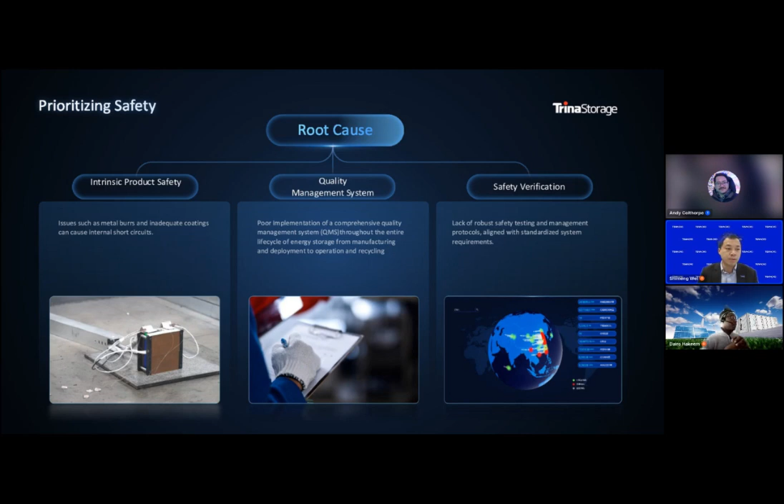We start with identification of the hazards. The hazard is the damage that could be done to the people and to the environment, causing a loss in money or in health. That's why for the battery storage system, we start with identifying what could do damage to people and the environment. The risk is actually a combination of the possibility that a hazard could happen and the severity of the hazard.

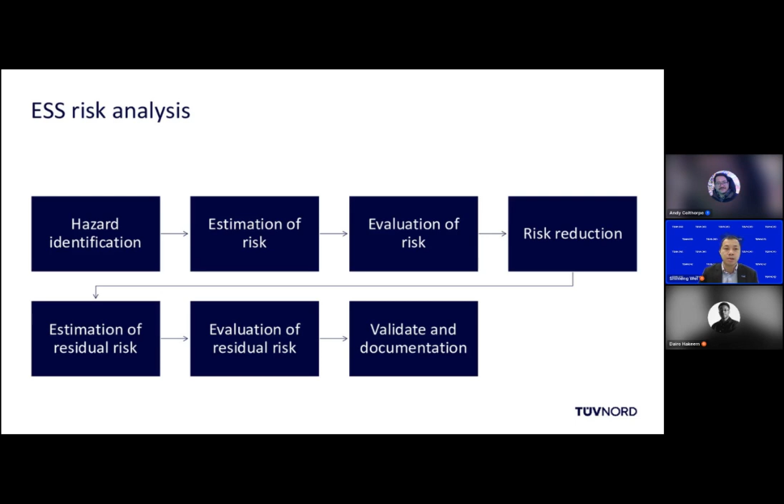For the battery storage system, which is a combination of high voltage, heavy machinery, and the possibility of overheating, here are some examples or aspects to consider when identifying hazards. Such as electrical hazard, which most of the time could cause electrical shock to people, and also arc flash, which can lead to other potential hazards like fire.

From the mechanical side, we should consider that now the energy storage system is bigger and bigger, and each battery pack is also getting heavier and heavier. So the risk of the battery pack dropping could also cause damage to maintenance people, and furthermore could also cause explosion of the system.

And we have the fire hazard as well, which is clearly on the way. And we have the temperature hazard, either too high, which causes damage when people touch the battery pack, or too cold, which could also cause problems with the system itself.

When explosion or fire happens, the chemical hazard comes out, where we can see gases leak into the environment and cause severe damage to people around. We also have something not visible but always there: magnetic and electromagnetic hazard, and for maintenance people, unsuitable working conditions could also cause problems.

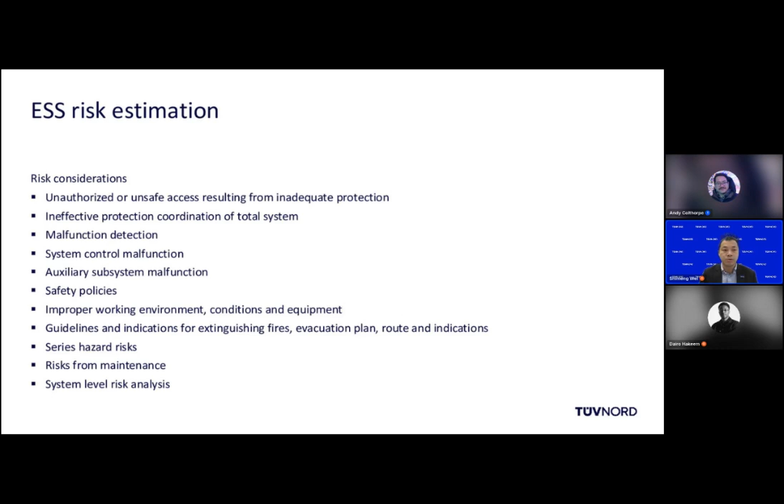The next step, as we just talked about, is the risk estimation, where we need to consider the risks that could happen. Something I want to emphasize is that the battery energy storage system is quite new in the market. Therefore, something still not so perfect in the real world, such as safety policies, guidance and indications for extinguishing fires, evacuation plans, routes, and indications. These are things that will have to be perfected over time and have to be borne in mind alongside all the other considerations.

With regard to the evaluation method, there are some systematic methods that could be applied. Nothing is good or bad, it just depends on the hazard or the risk we want to analyze—different methods could be used. When we categorize these, we can use the bottom-up first principle risk analysis, such as FMEA, and also other ways like Fault Tree Analysis (FTA), which is a top-down analysis, and also some combined or integrated analyses, such as HAZOP methods.

In the end, we need to take some measures to reduce the risk. There are generally two categories: preventive measures and protective measures. Preventive is when you do the design to make sure the risk is prevented from the start. Protective is like a safeguard when the preventive measures aren't working or have problems, so you still have a second layer that can protect and reduce the risks.

There's one particular thing I also want to mention: operation and maintenance. In the market, since battery energy storage systems are still new, the experience for operation and maintenance work still needs to be perfected over time.

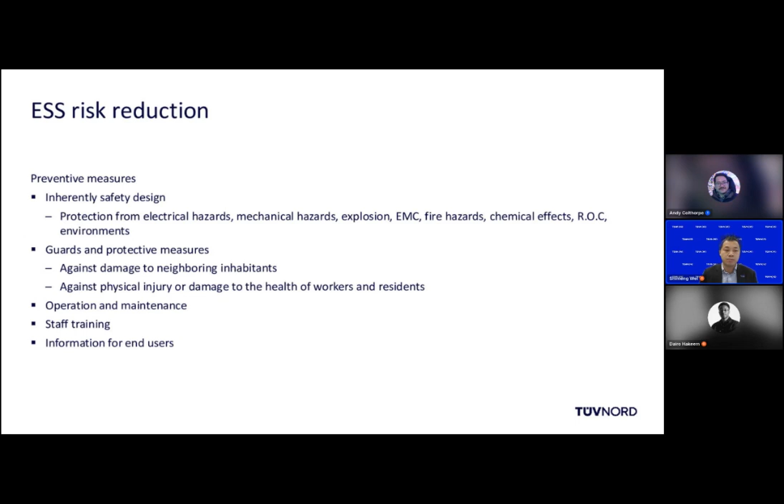Thank you, Shimeng. So we've talked about the general challenges we face, safety, and the risk assessment. I think what we're trying to highlight is how much work needs to be done to achieve the safety goals set, either at the start of product development or project development. With batteries, yes there's product safety, but there's a huge chunk of the overall safety plan attributed to the project or the site. That's just one aspect that's really important to consider aside from the product.

So I'll jump straight into talking about our product, what we offer the market to try and alleviate some of these pains, and how that could work in your project or on site, based on what we've designed.

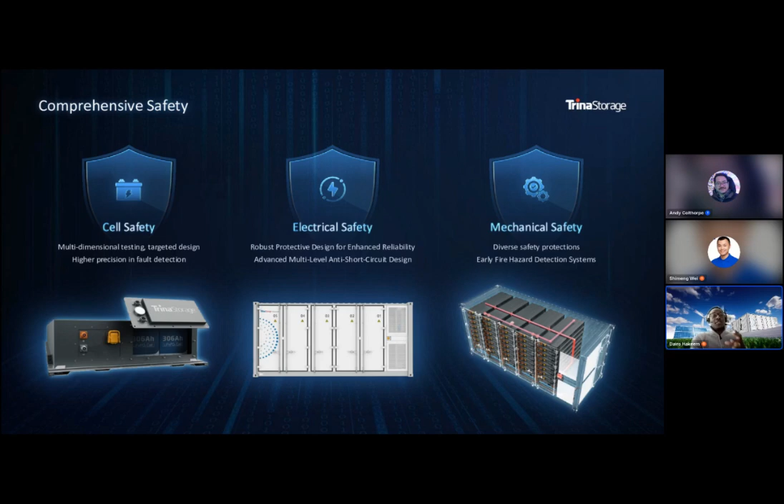Looking into that, I'd like to introduce our Elementa platform. This is Elementa 2. There might be some on the call who already have an Elementa, who have evaluated or looked to have one. I want to talk through some of the key features we have that help promote its safety.

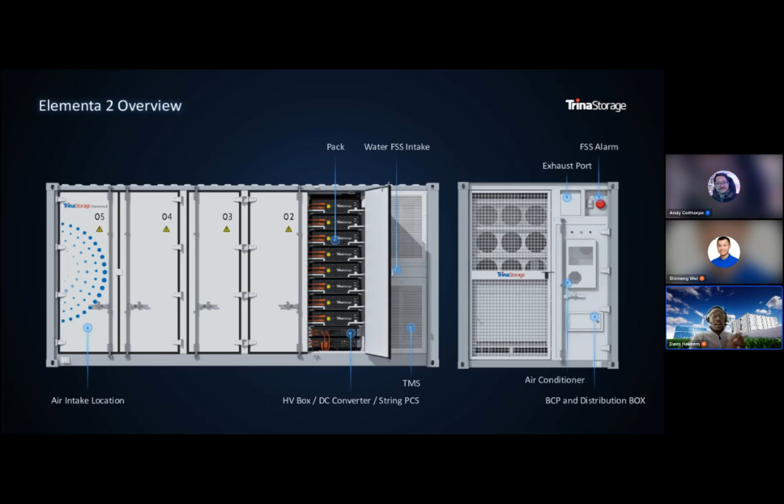So that's considering the alarms, the dry pipe sprinkler system, and the sensors that we have. Actually, let me move to the next slide so I can show that.

So that's the use of a water sprinkler system, dry pipe, heat detectors, smoke detectors, gas detectors, and the aerosol discharge in effect.

And this would be a section that everyone might have a different opinion on, what's best in class, what's the best way to do it.

Having done this and read several books, it's very hard - we don't have one full consensus on what is the best way, but this is our understanding of making sure we're able to satisfy the requirements.

I think one of the challenges generally is how we harmonize all the different requirements for different regions to allow us to create the best product.

But for the Elementa, as shown, I've listed the components, and what typically happens is if we have all these sensors and detectors, it's primarily to make sure we're able to capture any abnormal situations at any time.

We want more than one data point because there's going to be more than one indicator that you might have thermal runaway.

What you might not know is thermal runaway doesn't always have a fire. You can have thermal runaway without open flames. So that's something to consider, because this is the reaction of the batteries that we're trying to understand better, and we're trying to protect against delayed explosions and all those parameters.

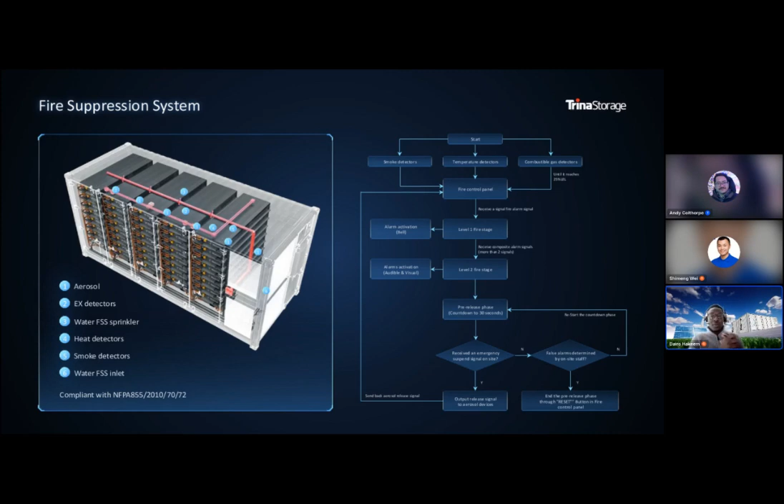So I think that's probably it on the product. There are several little features, but these are the key ones to talk about, and we can cover further details at a later point, maybe through questions.

I would now like to talk about some of the standards and the validation we do, just to highlight and promote the fact that safety is a big consideration for us, and we try to meet our safety goals as diligently as possible.

But before I jump straight into that, I will hand over again to Shimeng to talk about some of the standards that TUV have been looking at from a battery perspective.

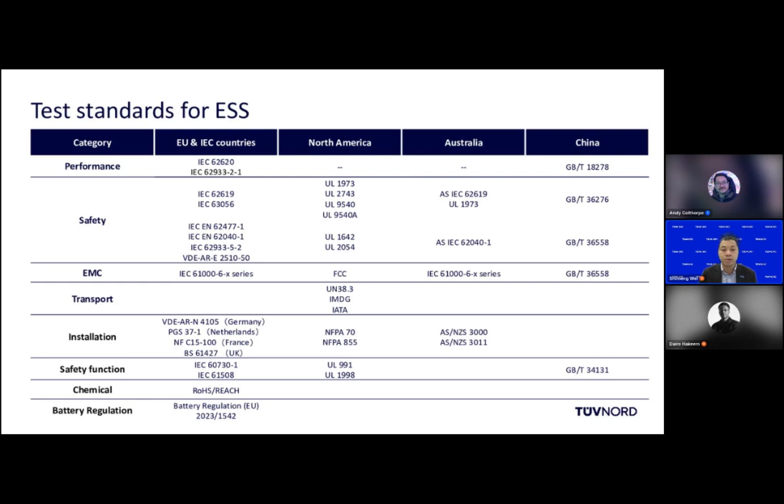There's also a big topic for fire and explosion protection. That's where I made a separate table.

This is very important for the battery energy storage system, because as we know, to get something on fire generally needs three elements: oxygen, fuel, and heat. But for the energy storage system, you don't really need all three. You can have just the heat and the fuel, which is the battery itself, because the battery is already an energy source, and it can catch fire or explode without oxygen involvement. That's also why it's really hard for the energy storage system, once it starts to catch fire, to put it out.

So that's where there are a lot of regulations and standards that could and should be considered to validate and test, to make sure the battery energy storage system has a safeguard against fire and explosions.

Going back to the very first page where we talked about the potential hazards energy storage could have - this is another categorized table, which shows what tests can be done to evaluate and validate the measures taken for different hazard considerations.

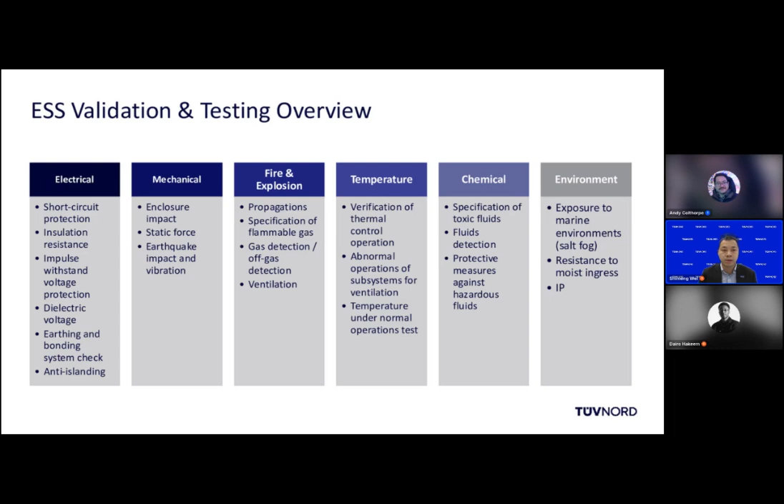Here are some other examples. For instance, the overcharge control voltage test simulates that the control system in the battery, the BMS, is not functional and could cause an overcharge for the batteries and abnormal excessive voltage, which could cause further explosion or fire. This is an instruction from IEC 62619.

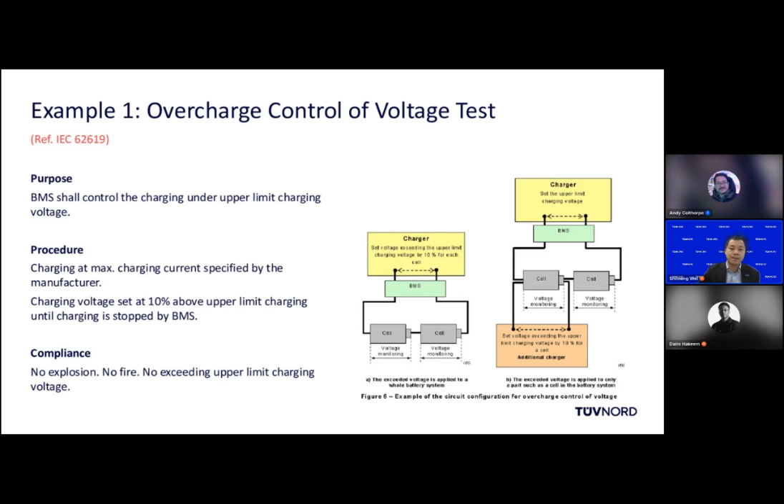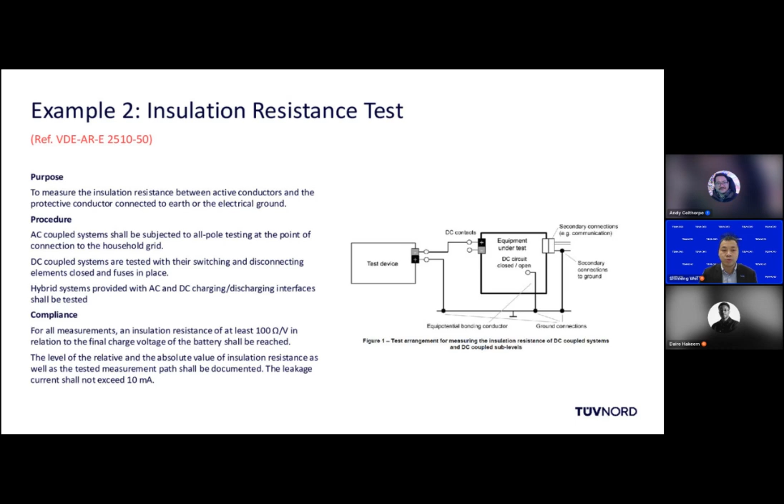The other example, from the German standard VDE 2510-50, is the insulation resistance test, to simulate an electrical shock that could cause hazards to people touching it.

One important aspect and example is extracted from 60730-1, which is the functional safety analysis. This is also quite important, especially when the BMS manufacturers or the system integrator use a BMS, an EMS, and other management systems - they must cooperate with each other to achieve a good system integration level.

It's also really recommended that not only the software part for functional safety is analyzed, but the hardware itself is also analyzed, because the BMS in the end is an electrical component or board that controls the current flow. We know hardware or electrical components have a certain lifetime, and with longer use in the field, the failure rate will increase, so we need to analyze such behavior on the hardware level as well. Okay, thanks.

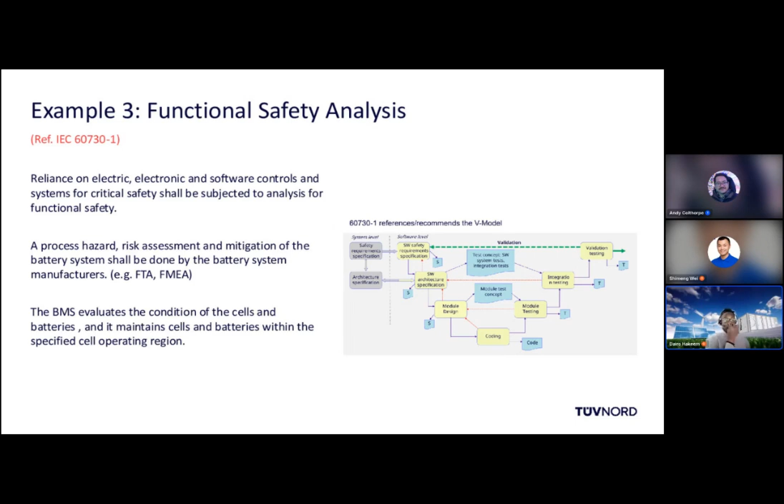Thanks again, Shimeng. That's really helpful in understanding all these different requirements and regulations. I'll tag on to that, and try not to take too long here.

Our test list and certification list are extensive, but I'll just highlight some key ones. Some of the electrical validation we do around installation testing includes a withstand test and a grounding test, all done according to standards and requirements developed by the industry, keeping in line with compliance across different regulations.

As a manufacturer, I cannot overemphasize that the challenge for us is keeping up with the varying requirements across different countries and regions. Having some way of standardizing these could be quite helpful in how we design for a better tomorrow.

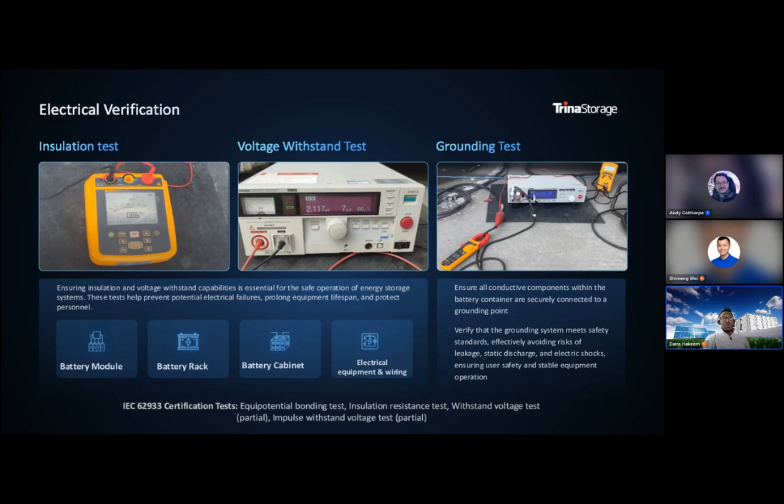That was electrical. Now mechanical verification. One fault I identified earlier with the previous incident was an electrical issue that got carried over into the battery. On the mechanical side, if you don't design an enclosure that's weatherproof—meaning it can withstand significant adverse weather—you could end up with a situation where a thunderstorm breaks the enclosure and water leaks into the battery, causing a short circuit.

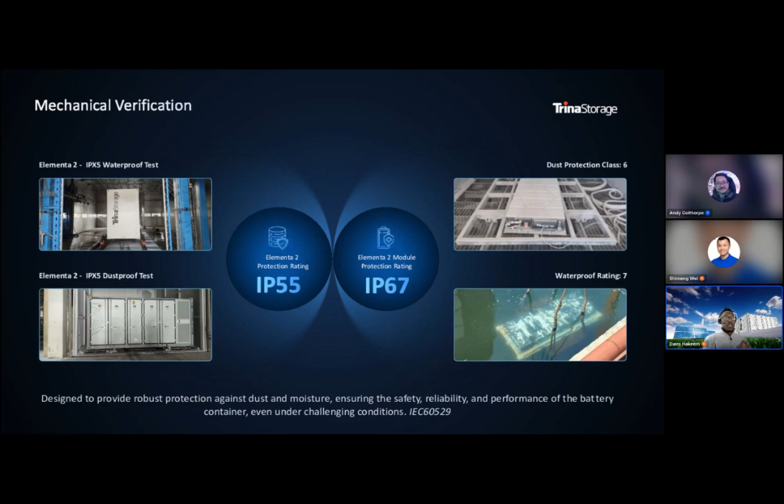Thermal verification, or thermal runaway verification, involves abuse testing. We conduct this at different product and component levels to make sure we are not at risk of thermal runaway, including overcharging, overheating, drop testing, and over discharge tests at various points.

Think about UL 1973, which Shimeng showed earlier. What we tend to do is put a normal cell or device under test, DUT, into an abnormal condition that could realistically happen—short circuit, dropping—and see what happens. Does it spontaneously combust? We definitely don't want that. We confirm it doesn't combust based on realistic abuse conditions it could face in real life.

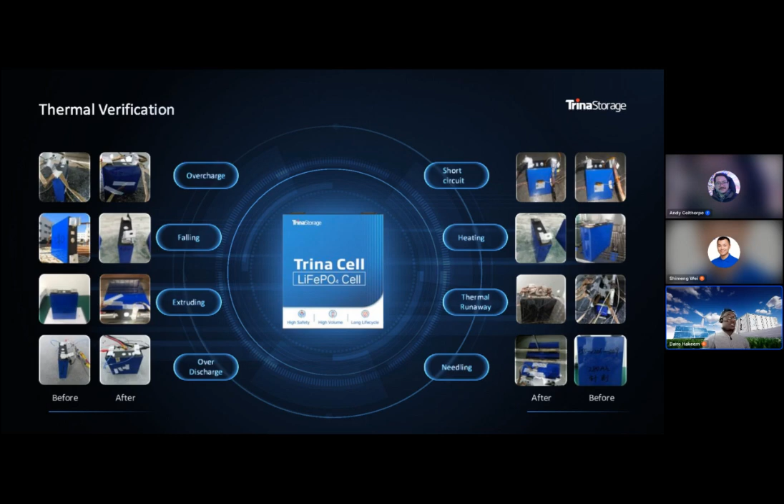We then move to a 9540A test, where the aim is to put that DUT into thermal runaway and evaluate how it behaves during operation. I picked UL 9540 as one of the product certifications we go through—it validates how thermal runaway could occur in the system and whether it propagates. The intention is to make sure it does not propagate across the whole system.

We've done unit level testing, which manufacturers typically do, but I wanted to highlight how we've gone above and beyond. We only need to do the unit level test according to several regulations, but we've also done an installation level version. I'll show a video now—it is quite loud, so please turn down your volume.

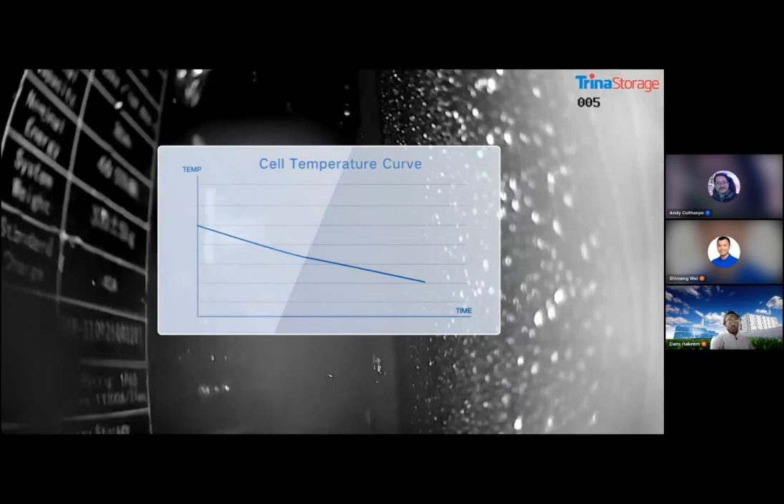I hope everyone saw and heard that correctly—that's just an indication of what we do. We try to go above and beyond where we can to evaluate. In that test, our fire suppression system components all kicked in and behaved as they were supposed to. We triggered thermal runaway in a module to understand the gases generated and how much heat is produced, as you can see from the cell temperatures in that module on the chart, reaching 600 degrees Celsius inside. Again, it's validated: if thermal runaway happens, it doesn't propagate, and our systems can put these events out accordingly.

I'll move on, being cautious about time, and hand over to Shimeng now, who can talk about what a roadmap looks like for a successful ESS project.

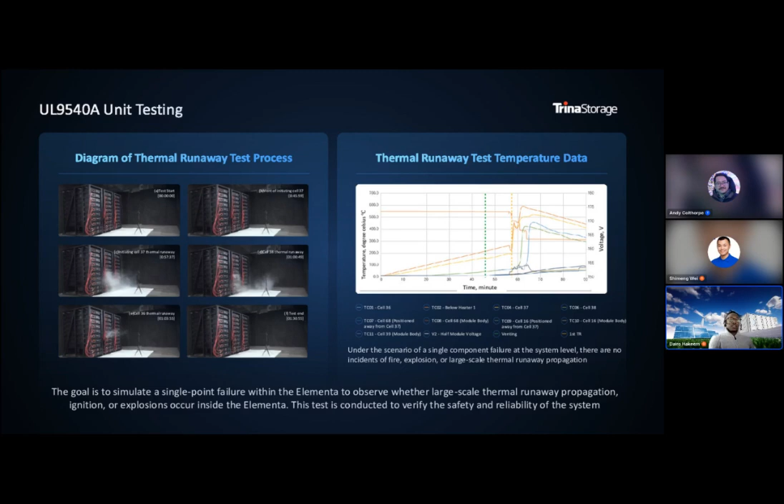So we talked about the product. Trina also introduced a very comprehensive product they made. And I would also like to take this opportunity to introduce the project-wise, where the product is selected with a very good product. But it's not only the product that could lead to a successful energy storage system project, but also starting from the preliminary study, where the product is part of that, and also the investigation of the site and the feasibility study about putting a battery storage system in such an area.

Is that good or not? And then about the overall design, not only the battery storage system itself, but also all the other balancing parts of the project site. You need technical consultancy about the contract, about the review of operation and maintenance partners, about all the suppliers, about all the technical specifications needed, management in the supply chain to do factory supervision of production, lab testing to verify the end product is the same as the type approval product. We also have to take care of construction technical supervision. And after, or before, the commissioning of the battery storage system, we also need a final acceptance test on site to make sure the performance and the safety are all in compliance with the design.

What has become clear from the different aspects of the battery is what's considered mandatory to evaluate when you put the product in the European market: safety, performance, chemical, and carbon footprint is also a big topic. The problem is it's still under the harmonization process to decide what standard is good for what type of battery, because the regulation categorizes different types: portable batteries, batteries used for automotive, light traction and others, and also industrial batteries such as battery energy storage systems. The other aspect is installation, which is mainly country-specified. Germany, Netherlands, UK already have different installation requirements. So these are the two aspects we need to look into, and these are considered mandatory.